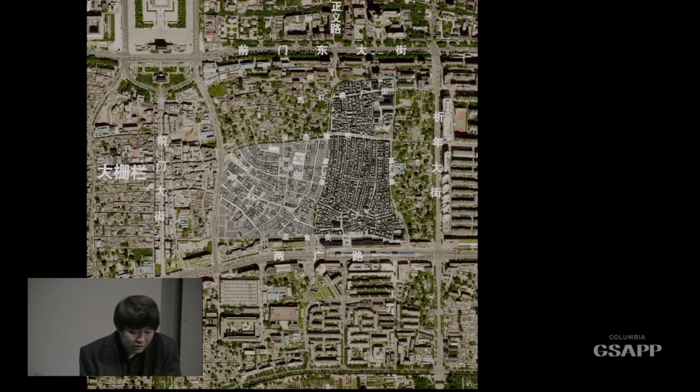But after, when I came to New York, I saw a completely different type of city—not only the vertical skyscrapers, but the intensity of how the city presents itself. In Chinese eyes, beyond just the intensity of the skyscrapers, I also saw a poetic atmosphere behind this type of scene.

In my eyes, at the time, the city transformed itself into a traditional Chinese vertical hand scroll. It has mountains and seas and valleys. Even the water towers on top of the buildings, in my eyes, became little pavilions and tea houses. It stirred up a lot of imagination.

Even the noise, the ambulance, the fire trucks on the streets—to me it very strangely transformed itself into something quite different. So I always see the city existing in two different ways. One is the city we experience in the public domain, on the streets—a vibrant city.

But once you get on the elevator and go up through the dark tunnel, all of a sudden you reach the top and see a completely different kind of city. So it's a city above the city. It gives you a completely different experience.

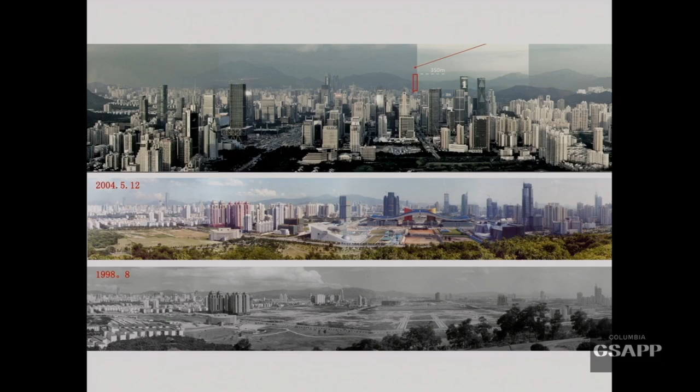We have been very consistent to concentrate most of our work in the city. We thought that architecture tries to reestablish and stimulate a meaningful urban life in the current Chinese urban reality. And we witnessed the kind of dramatic change during the past 15 years in Shenzhen.

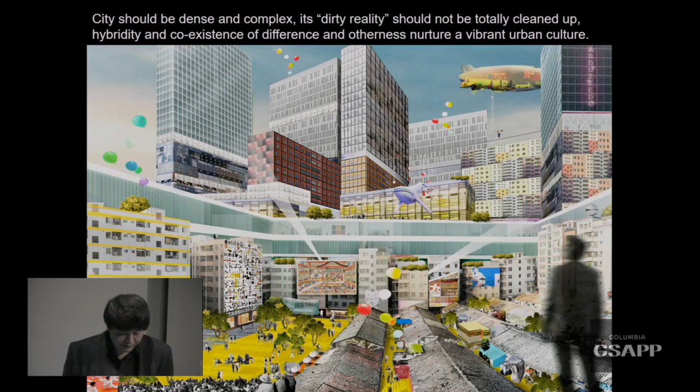We believe that the city should be dense and complex. It's kind of a dirty reality, it should not be totally cleaned up. Hybridity and coexistence of difference and otherness nurtures a vibrant urban culture. I think that belief supported us for all these years' work.

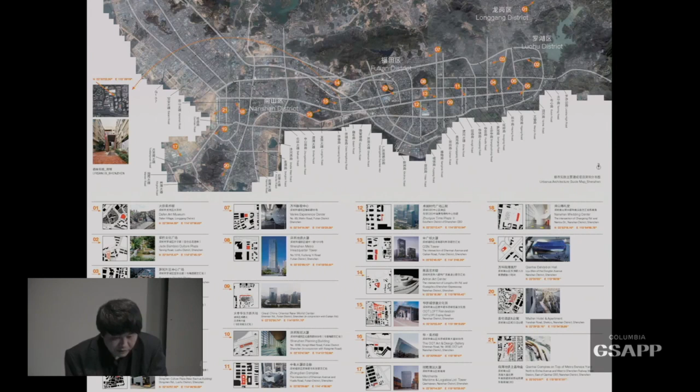And we have done a lot of projects. I'm not going to talk about all of them. I would need like 3 hours to do that.

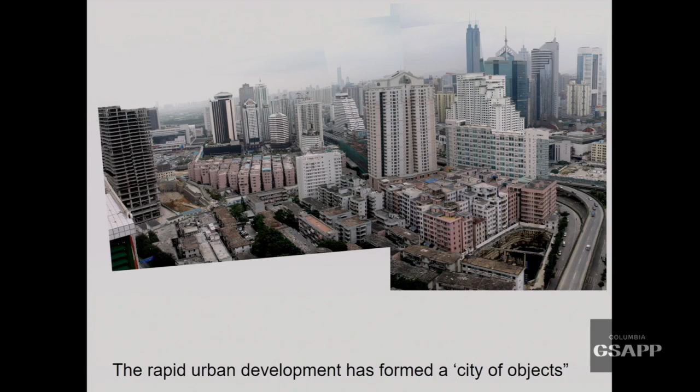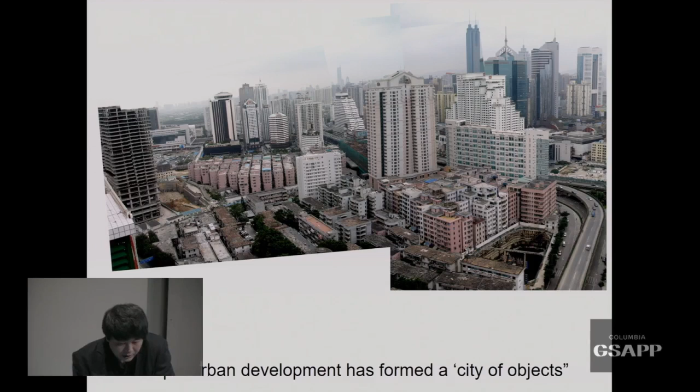But this is the kind of condition that we were facing once we were in Shenzhen. It's a city of objects, of things crammed together without much organization. If you look at this picture, it tells you the kind of situation. Because of the fast urbanization, there are isolated urban voids and residues everywhere.

So the very first task for us, these are very old projects, I'm just quickly going to go through, was to refuel all these kinds of voids. So we called it an urban refuel campaign, to try to establish linkages and new urban functions in the existing urban space.

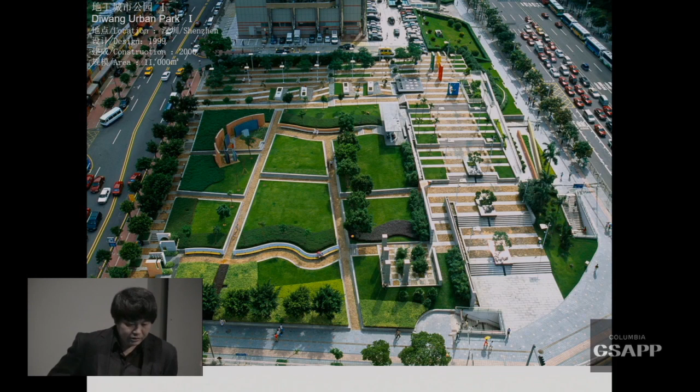Resulting from that, we did a series of these urban public spaces, because there wasn't much else to do at the point. So we picked up all these little jobs and tried to fix them.

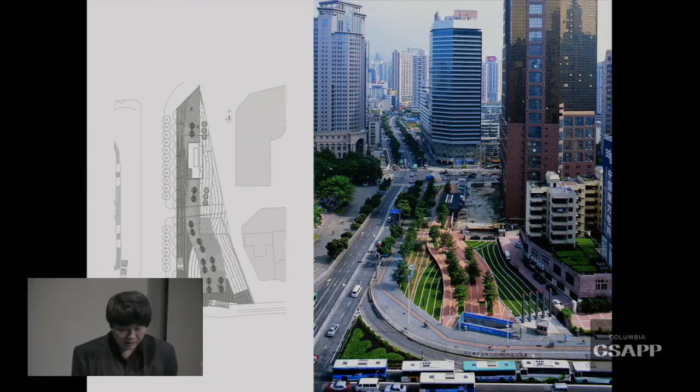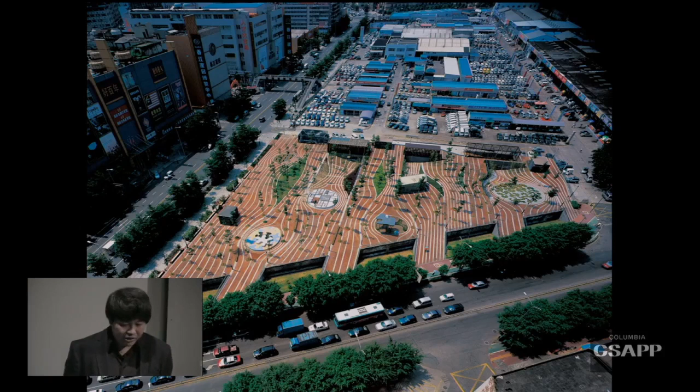But I think the point is that at the time, because of the unstable situation, because of the clients, a lot of times the city, the government, doesn't know much how to handle this type of residue space. So we gave them suggestions and proposals, and they accepted.

A lot of times, for example like this, architects have an opportunity to work with the clients to figure out not only the building program, but how to use them.

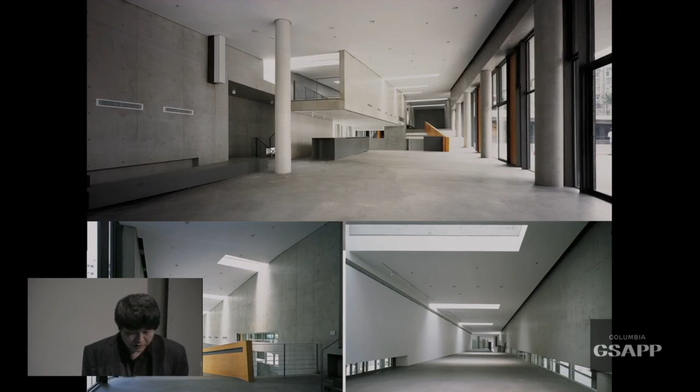So this is one of the first built projects we did in Shenzhen. It's a little museum building with landscape and public space. And it's also one of the first exposed concrete buildings in Shenzhen.

And residue places like these, gradually we transformed them into little gardens and pavilions. We have kept doing this for almost 10 years.

A lot of these projects are already gone in the process of the latest urbanization. It played a significant role at the time to provide leisure spaces and public pocket parks for the immigrants in the city.

So then we realized that it's important, when practicing in a brand new place, to research and learn about the city even before you start designing. So we call it research design.

I think the key point is this particular project. The research we did is not just research for research's sake. It really, at some points, led to the final design product.

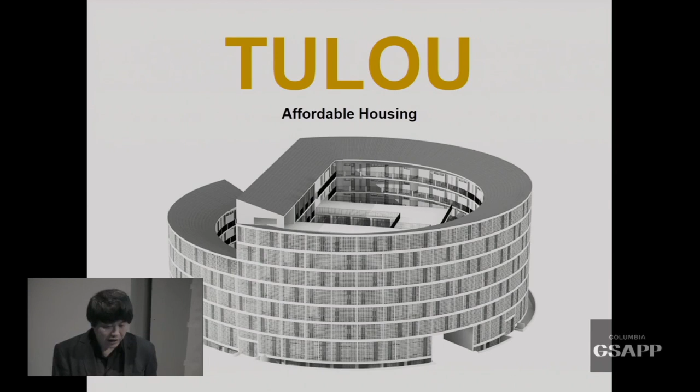So it was at the time when the housing price in Shenzhen exceeded the capacity of the majority of people who lived there to buy the product, to buy the housing. Around 2005 and 2006, it was the point the price got skyrocketed.

It was exactly the same time we got the task. It was a research topic, it wasn't a real project at all. A lot of people didn't know that.

It's a research project to study the possibility of adapting this typology, this prevailing tulou typology, into a kind of dormitory-like new housing. So it was a given topic, and we did this research.

We researched all the different sizes, the spatial configuration, and also how people use that. So we came up with a series of research findings and proposals.

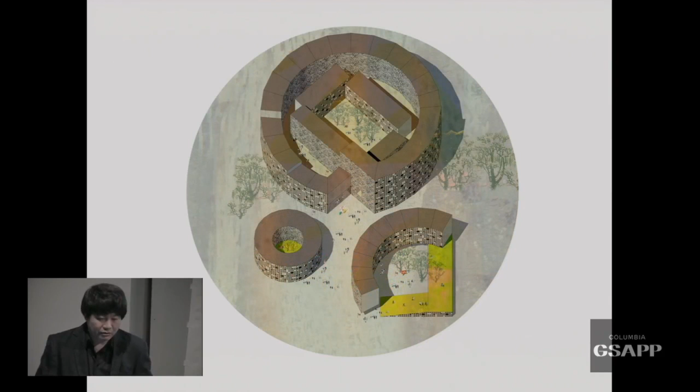Sometimes we think that this typology can be used in the urban condition on top of the shopping mall, or maybe more isolated, or somehow combined to create a little group.

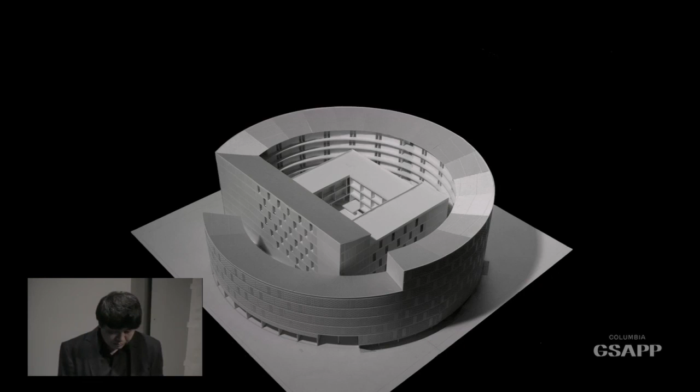And finally, the developer got interested, and they decided to do an experiment to maybe build it. So they selected one of the topology. This is how the Tulou came into existence, really because of the research.

More importantly, we came up with a strategy for how this could be adapted in an urbanistic condition, and how the city and developer could collaborate to acquire cheap land to put this kind of low-income housing anywhere in the city. This is how it's adapted in the end. It becomes, instead of a castle-like typology, really open and porous.

Originally we didn't have a site. But later on, together with the developer, we found this one close to the highway. So the dialogue between the building and the neighbor becomes really critical.

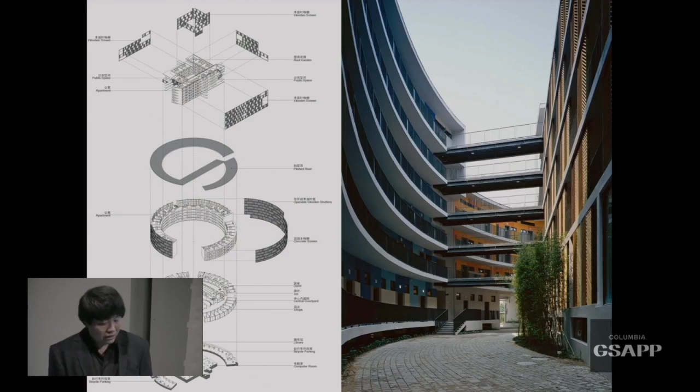The materials we use are really cheap prefab concrete panels. The building itself is a hybrid building - it's not just housing, but also has a little inn and public facilities and things like that. So it really becomes a testing ground for a new kind of collective way of life that has been gone for many years.

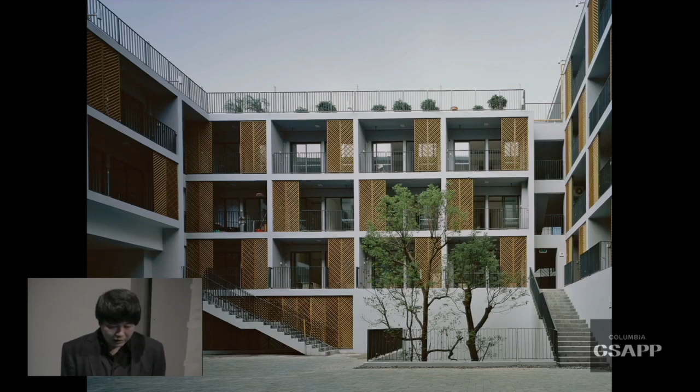So we did that internal courtyard. We added a bit more dense area, and we built it in 2008.

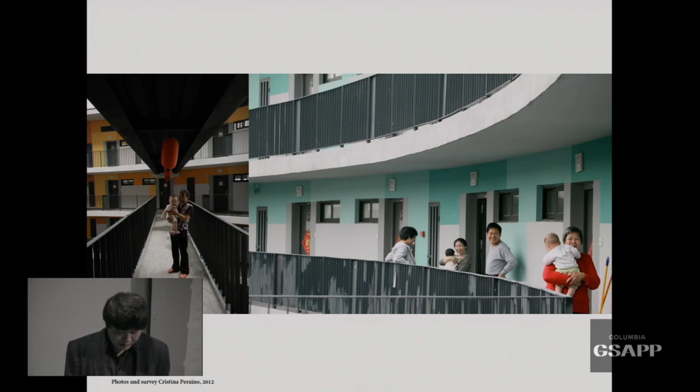Life has evolved quite a bit after its completion. We've been using that as an example to see how a new community is formed. We're very glad to see that there have been 24 newborn babies out of this Tulou. There are many babies along with old ladies.

Hybrid stacking - we learned the experience from New York and Hong Kong as well, how to do vertical buildings. In a site like this, it's a very dense urban site in Huaqiangbei, which is very famous for electronics. At one point it contained 60% of the electronic parts in entire China.

This huge market is vibrant, full of activities. But what happened is that the city government always wants to clean it up and make it a usual shopping area instead of studying the nature behind it.

So we did a lot of research on Huaqiangbei and saw how different businesses coexist in this type of urban condition. It's really not just a shopping street - it's an area intertwined with a lot of different forces.

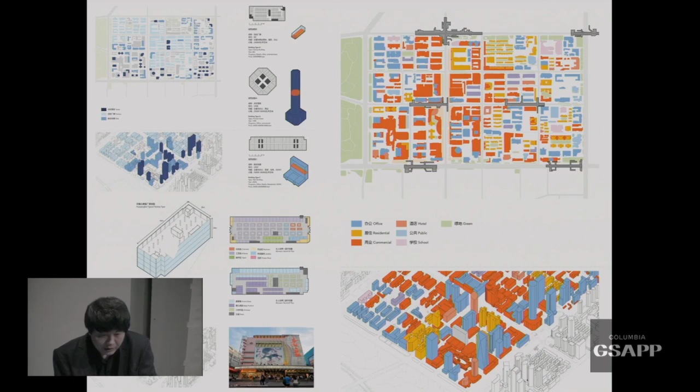So once we had a project in Huaqiangbei on a very tight site like this, we noticed that there are about 200,000 people passing by this site every day. The site had a small hotel in the middle, and the client called for a vertical parking structure with compensation for this hotel.

So what we figured out is that it's a good opportunity to reroute a lot of the existing traffic - pedestrian or vehicular - and also the logistics on the site. So you see the building actually has a lot of arms connecting to the existing buildings.

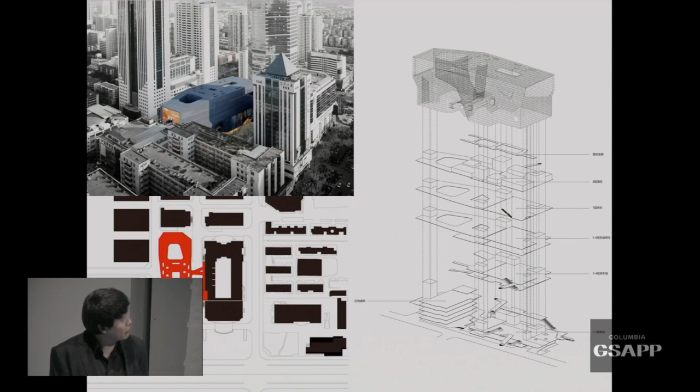It's an infrastructure - a vertical infrastructure. It contains retail space on the ground floor, logistics underground, multiple parking structures in the middle, and a hotel on the very top. So it's a very hybrid building.

The requirement was that there was one existing building on the site which couldn't be demolished, and all the businesses had to keep operating during the construction process. So it was quite a challenge to keep the building with all these volumes added on top.

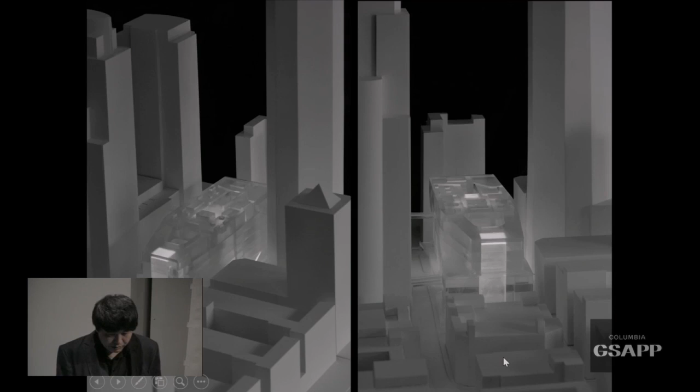So this is the kind of model that is more than a regular building. It really becomes a machine that contains all these different portions. Even the multiple parking is considered flexible for future developments, maybe for retail, maybe for other purposes.

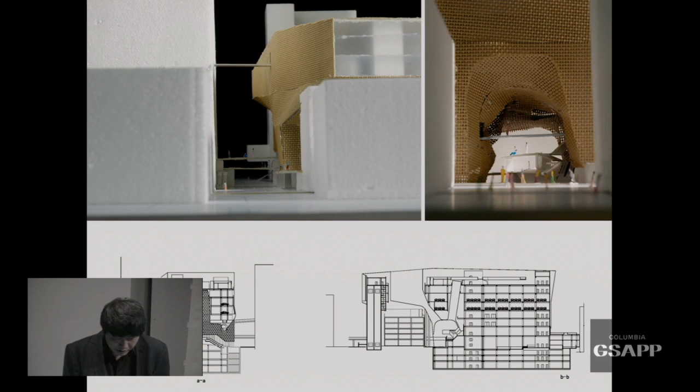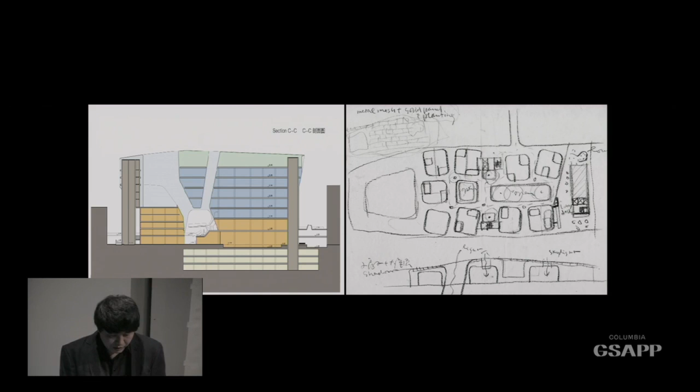On the top, I was envisioning a kind of village-type hotel on the very top, because of the privacy issue - you have to keep the privacy.

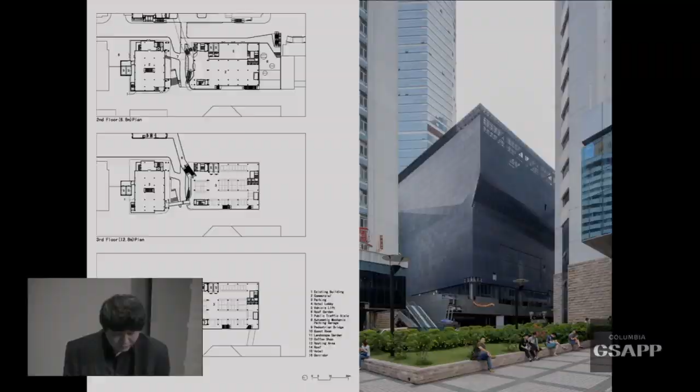It tries to link with the surrounding building. You don't see this building from the street. It's actually internal, and it's hidden.

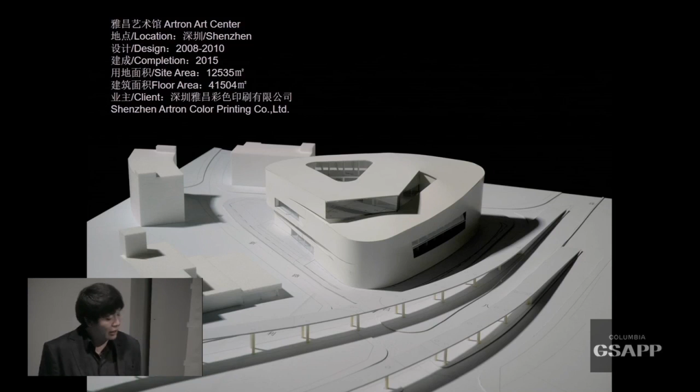So this is, for us, a very interesting typology that we carry this thinking in a tight site into different buildings. For example, like this one.

On the periphery of the site, the clients called for a hybrid building with factories, a museum, and a library, and their headquarter office. We can't put regular buildings on the same site, so we have to stack them somehow from the bottom up. And so we figured maybe the building can be integrated and works also with the surrounding, even if it's a very tough, kind of chaotic situation like this.

I like this photo. It's a hybrid building. So the museum is at the very top, the factory is close to the noisy highway, and the office is at the other corner, forming an internal courtyard.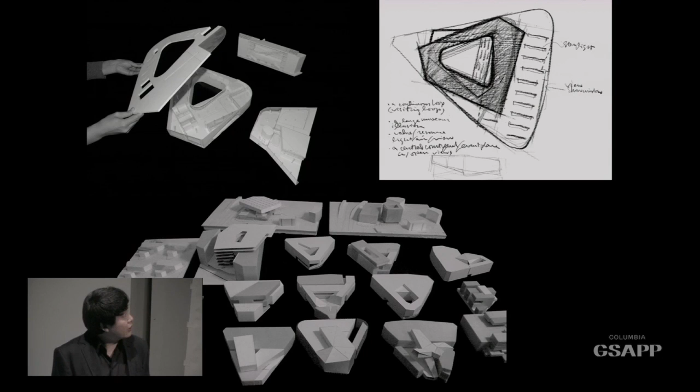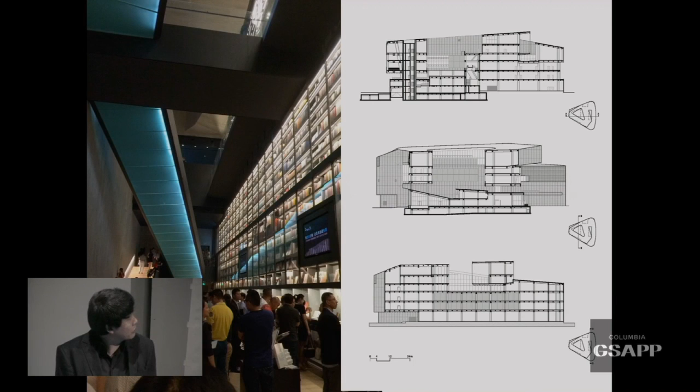So the building looks simple at the beginning from the outside, but it's very complicated inside. It has a kind of vertical library at the very center of this building. It cuts through the entire plan, and the factories and the museum can see each other at the beginning, at the middle. So this is kind of the library.

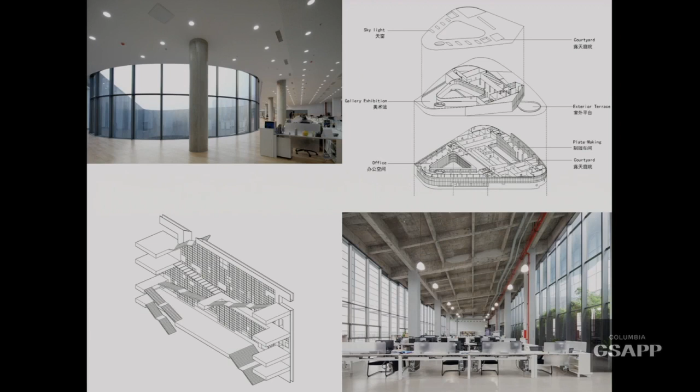It's kind of like an urban square that people meet every day. You have to go through this space to go to a lot of other functions in the building. So it opens up this kind of internalized public space in the middle.

So even the stairs, the courtyards happen everywhere in all parts of this building to get light and ventilation. So the building becomes monolithic at the same time, but also hybrid inside.

The competition called for a cultural and sports center on a very tight site. But later on, after we received the brief, we figured out that it's a very rare opportunity that we can stack things, and we have to build almost 70 meters of this cultural and sports complex.

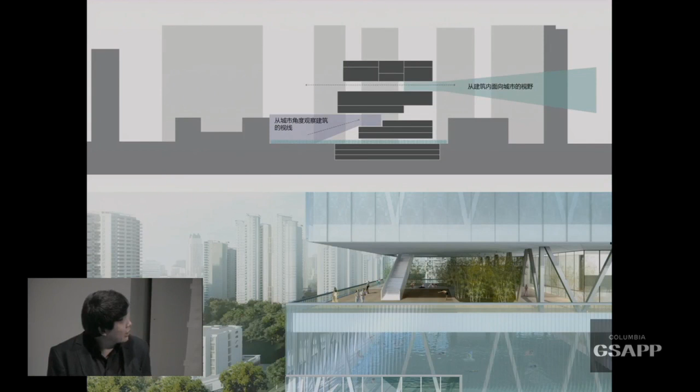So the circulation, besides the vertical elevator shaft, we created this type of linkage. We learned a whole lot from the Hong Kong and Singapore shopping malls, the vertical shopping malls. I think that could really create different layers of public space in the air.

So look at this section. It has the three components: the bottom, the theater in the middle, the library, and the swimming pool and sports.

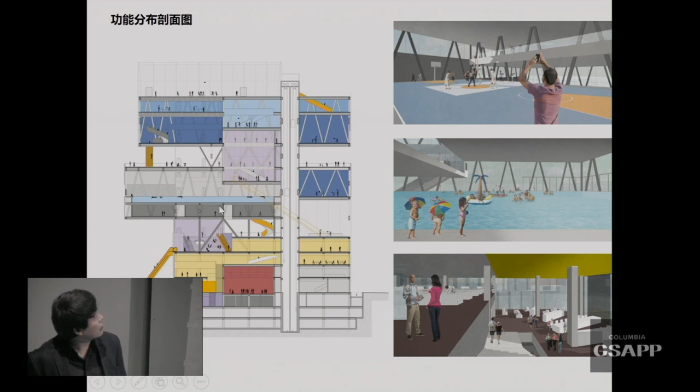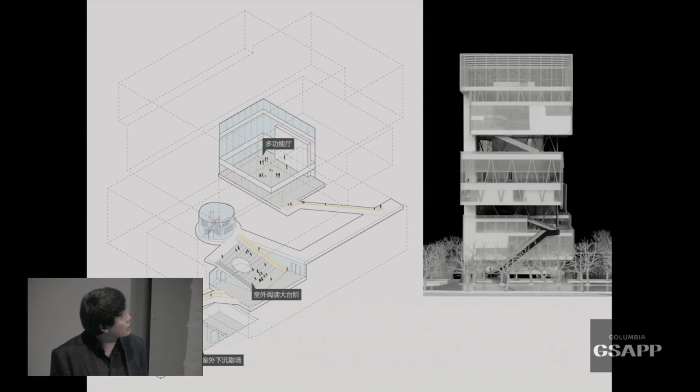And between that, there are public gardens connected by huge escalators, and they are linked together. So even after each component, each box, is closed at night, the public access is still valid. This is the model to show the kind of relation.

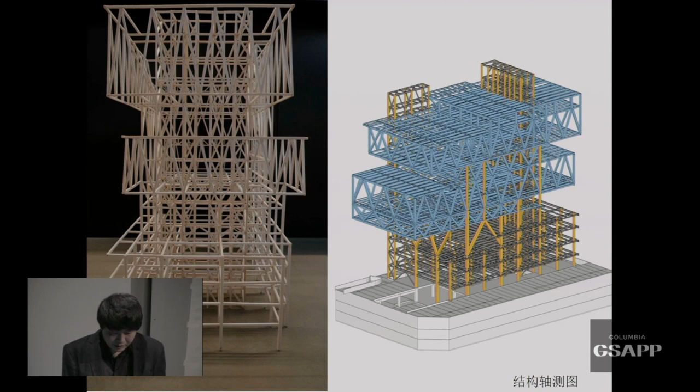Of course, this is very challenging structurally, so we hired a very good structural engineer to make the structure transfer, a lot of complicated structure treatments to make it happen.

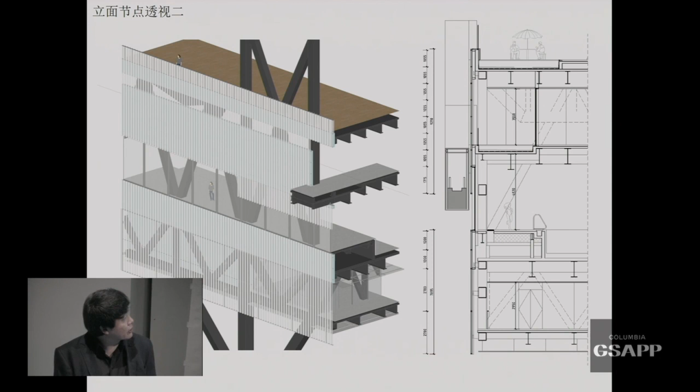So this is going to be how it looks. It's still in process.

So the very last of this series of stacking typology is this. We have a site between two little hills.

Shenzhen was a hilly town before. Because of the fast urbanization, all of the hills were razed to flat in the past 20-some years. So these are the two remaining hills in the middle of the city at the moment.

So you see the stripe here, right in the middle. There was a factory, and the developer got this space. There's a huge site; they want to build a kind of complex. It's a commercial complex. But what they did, this is the SOM master plan.

And we were given this. They're basically towers by SOM, and this is apartment towers by a Hong Kong firm. And Arquitectonica is doing a huge shopping mall at the bottom.

There was 100,000 square meters of loft apartment buildings left on top of the roof of the shopping mall. We were given the problem to design these apartments because the developer thought they could make enough money from the towers and the malls. So they didn't care. They said, whatever you do on top, if you do a slab, that's okay, if you do something else, it's probably also okay. But get us the 100,000 square meters done, that's it.

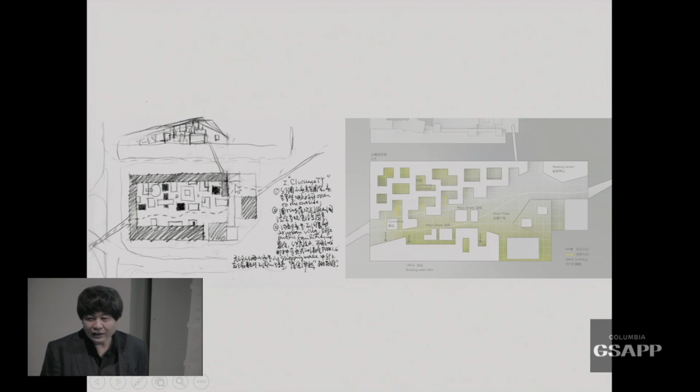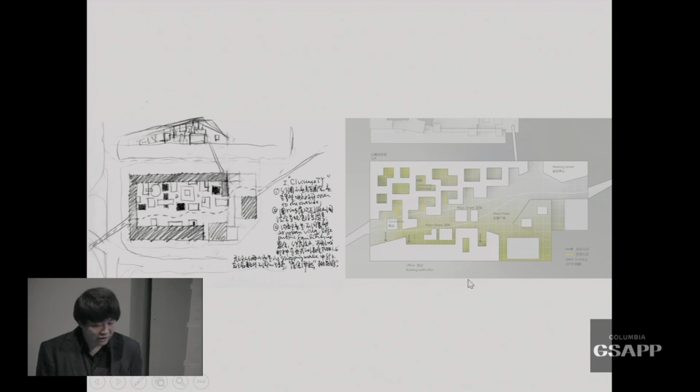So we talked to the client, maybe we can make it flat. We can do an urban village on top of that shopping mall. The client said, wow, it's a good idea, but remember, you're going to get the same design fee. That makes it a really tough job, right?

So we decided, okay, maybe we can do something that's never been done this way, to have smaller buildings on top of the huge shopping mall, which can really form a village-like setting, so that people going from one park to the other can pass through this area. We thought this is really different.

It reminds me of the New York experience. Once you're in a shopping mall, you don't know what's above you, and then all of a sudden, once you go through the escalator or elevator, you go to the top and you see the village. All of a sudden you see the village and you see the hills. So you're above the existing city. It's quite a poetic kind of idea.

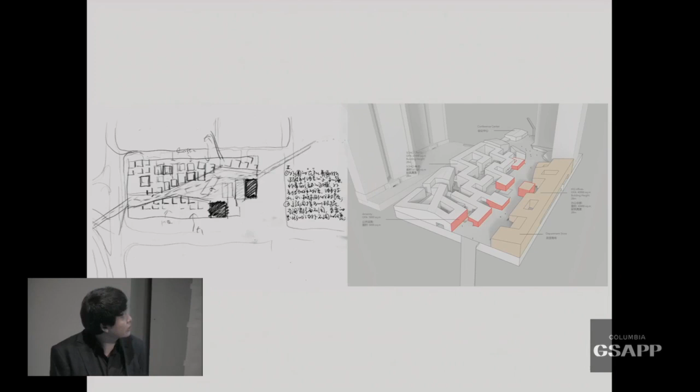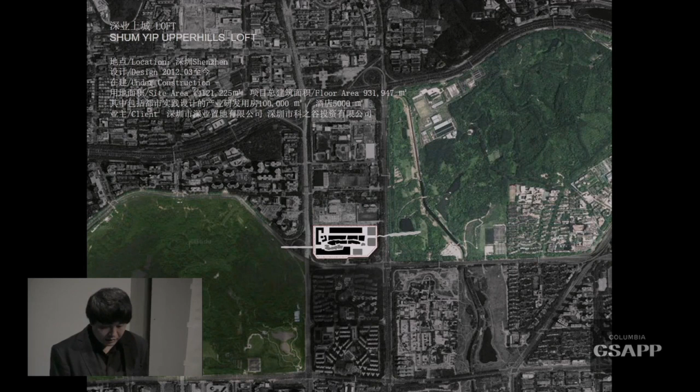So we thought, okay, let's do that. We created this little village with the bridges. It becomes an interesting kind of urban design project.

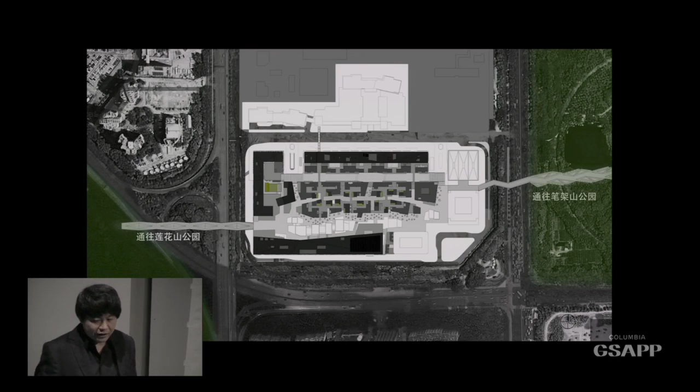But simply creating a village isn't really enough, because it will look really odd if you have a cluster of small buildings on top of the mall that has to have a dialogue with the towers. It's really tough. You have to somehow be small and big at the same time.

So we created this envelope, intermediate clusters of loft spaces that surround the village and can dialogue with the bigger towers. So it creates something like this.

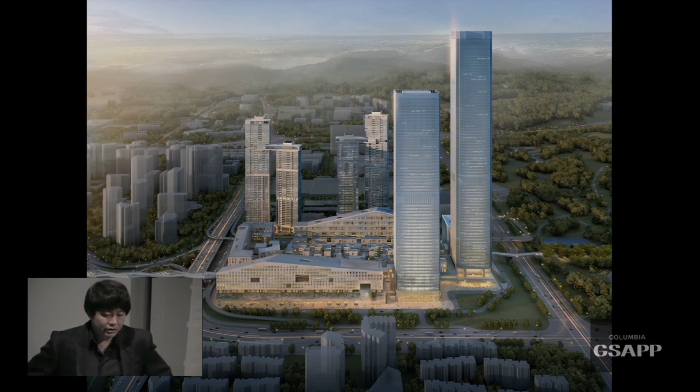On the other hand, we're not afraid of commercial projects. I think we do a lot of commercial projects. I think they have a lot of opportunity to have a bigger impact on the city than smaller works.

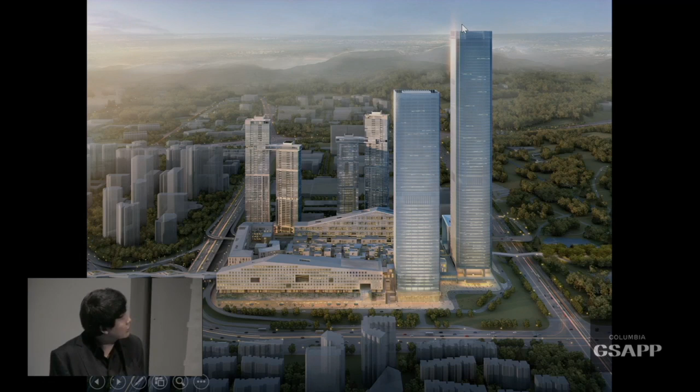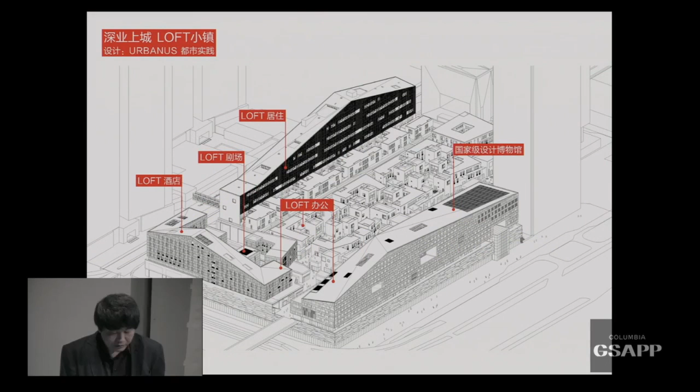So it created this layering of spaces, smaller in the center, bigger volumes surrounding. So we have this gradient kind of scale, and you see the mountains beyond. There's commercial and loft space, residential, office, museums, theaters, all together on top of the existing buildings.

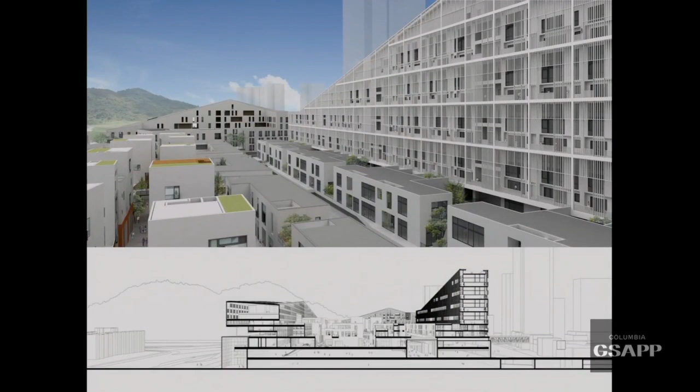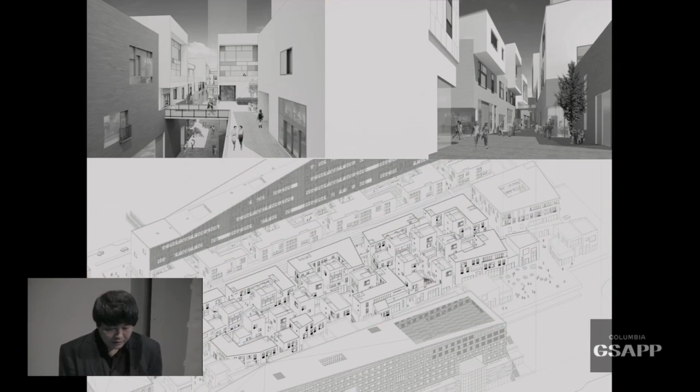So we tested all this, different sorts of units. The units are flexible, they could be 4.5 meters or 3 meters tall, so they can be modified later on. Architects only lay out the framework, and the users can later make modifications.

Okay, so beyond this architectural project, I have to speed up. I'll talk about another topic, which is the city's growing difference. Why does the biennale this year have to be in the urban village? What is the urban village?

Within most newly developed Chinese cities, the urban spaces are dominated by autonomous architecture typologies, such as gated communities, giant shopping malls, isolated office towers, and theme parks. This is very typical. On the other hand, the urban village, like this, is a byproduct of rapid urbanization. It's the result of this dual system of the previous planned economy—land ownership created this kind of urban setting.

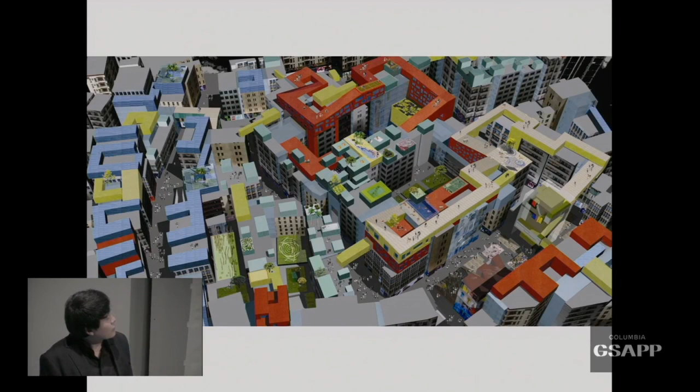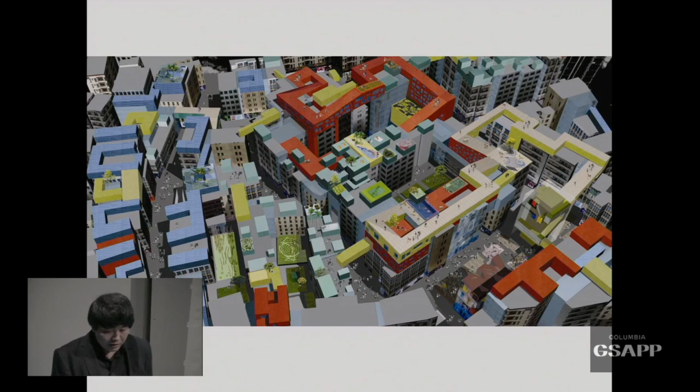Starting 2004, we have been researching these urban villages. We are trying to find ways to solve these problems, the super dense condition, lack of public spaces, and all these issues. Can it be resolved, or does it have to be razed for the urbanization? So we envisioned at that point a kind of rooftop urbanism which can connect all these buildings. We thought that could be a way to do it.

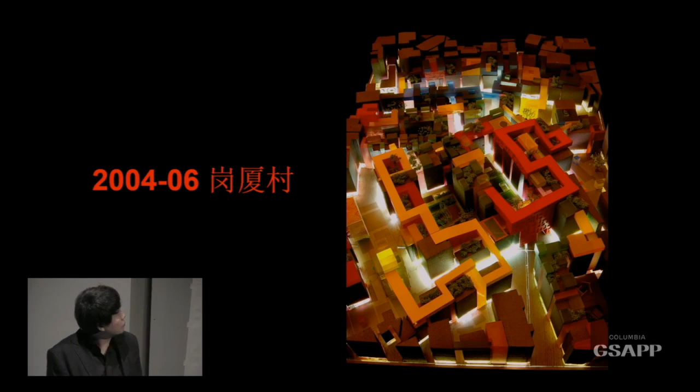In 2006, there was a critical time when the first urban village got demolished like this. And it was a very different, so-called successful story to regenerate the village across the border of Hong Kong. So this is the very first example.

It was at the time when the city of Shenzhen tried to integrate the urban village into the city, to get rid of all the urban villages in 5 years. The city announced the big plan in 2005. It was at the same time the first Biennale of Urbanism and Architecture happened, in December the same year.

So we exhibited the urban village proposal in the first Biennale, and we showed the city there are alternative ways to do it. That was a critical moment. Then we published this little booklet about the urban villages. But unfortunately, just before the Olympics in 2008, the village we were focusing on was demolished and replaced.

So a little bit later, we got involved in a real urban village intervention project in Dafen village. It was a typical urban village in the midst of the city. But it's also a special village because it contains a very interesting enterprise—an oil painting business that was imported from Hong Kong in the late 80s.

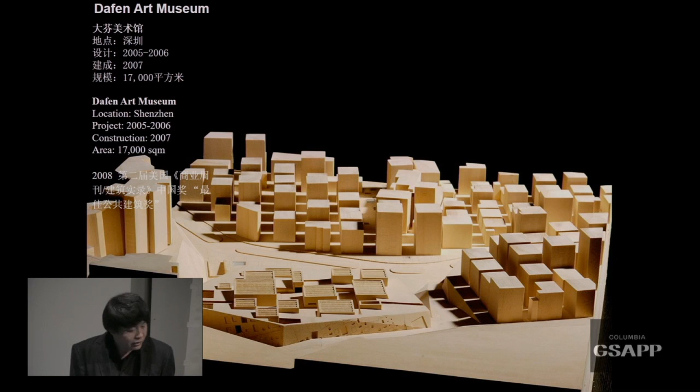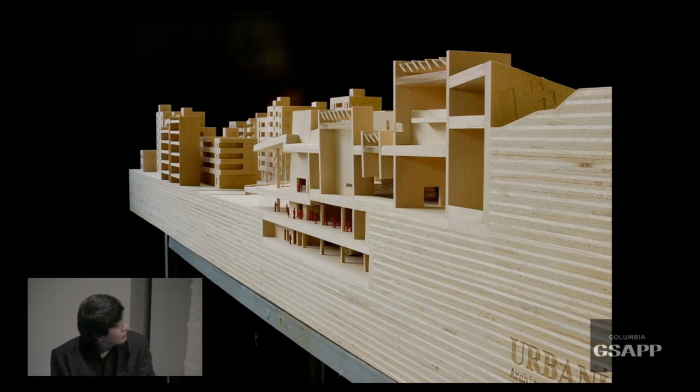So we thought the museum is a good opportunity to really make a linkage inside the village. The museum should not be a typical museum—it should be a sandwich, a kind of overlap of different things. Maybe the market on the ground floor, the typical museum on the second floor, and also a village on the top. So we made this proposal and it was finally accepted as this kind of hybrid museum in the urban village.

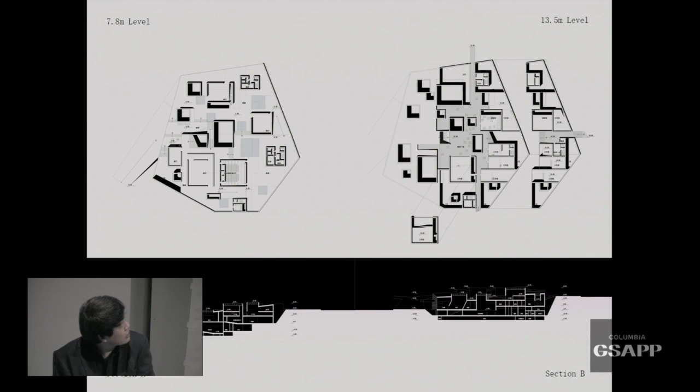The ground floor was seen as an extension of the existing fabric of the village with markets and a lot of public functions. The second level is a typical white-box museum. And the third level is a village of rentable spaces for tea houses, bars, restaurants, and a lot of other things that a typical museum doesn't have. We see the museum as a device to bridge the village with the surrounding city.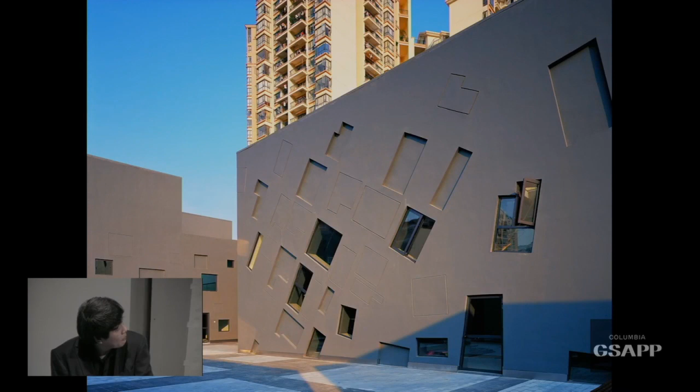So the museum was built in 2007, and it was kept empty for a while. This is a village on the top—this is a vision that we provided. It shouldn't be that simple and clean; it should be hybrid and vibrant. But now, after almost 10 years, it becomes one of the most visited museums in the city of Shenzhen. It's free.

It accepts a wider audience because of the peculiar location. It attracts a lot of visitors as well. So later on, we also organized a painting wall mural exhibition at the museum. So the museum itself is evolving.

It seems like an ever-ending project. 2010 is a critical point when for the first time we put the urban village on the international level. We made it really a public event. In the case of the World Expo in Shanghai, we designed the World Expo Pavilion.

Also, we organized events in Dafen. We produced this installation project with 500 more artists in Dafen, telling the individual story of each of these people who worked in Dafen for all these years. So this is really an exhibition not about architecture, it's about a group of people.

Their personal stories collectively become the Expo Pavilion. So it always has different kinds of components in the exhibition, which are interactive. And also in Dafen Village, there are a group of architects and artists who rework the museum with murals and other installations.

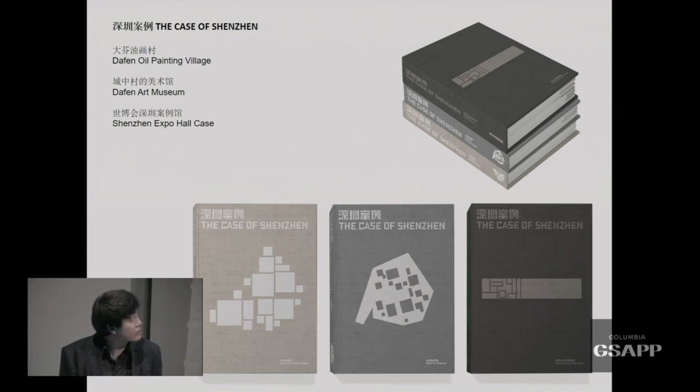And then we published a set of books. It's a collection of little books about Dafen, the museum, the story of the people, and also about urban villages in general. There's a new set of books coming out this year, called Shenzhen Case. These are the byproduct of the Expo project. It includes thorough research of a lot of the urban villages in Shenzhen, including Dafen as a case.

In 2011, we formally started this research arm of Urbanus. We started to use this opportunity to study the post-urban village time, which it seems we're unfortunately entering. Starting in '95, you see the city only contains this type of configuration, but after only 10 years, the city has expanded so dramatically. It seems that we are entering this kind of post-village era.

In Shenzhen, because of limited land resources, the city is undergoing a huge campaign of so-called urban regeneration. There are projects everywhere which contain hundreds of millions of square meters of regeneration projects. They're all the same pattern.

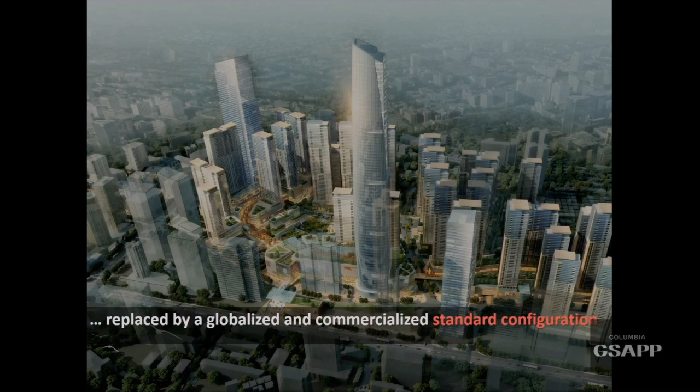So is tabula rasa the only model as Chinese cities now face this new urban regeneration process? We're asking: has urban renewal swept away the time-honored historical areas and the hybrid urban life? This is the condition we're facing - being replaced by a more globalized and standardized configuration everywhere. Not just one, but hundreds of these are happening. All the urban villages are about to disappear.

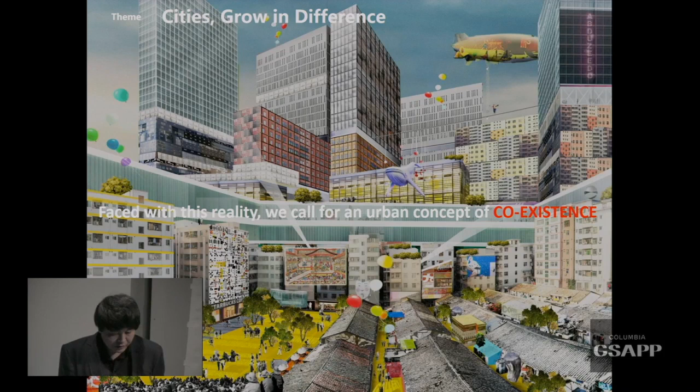So at that point we came up with the concept of cities growing in difference - it's really not just about the urban village, it's about the future of the city. Can we have a new city paradigm of coexistence? Today's city should be a manifestation of a balanced coexistence of different value systems. It should be a civilized community with maximum heterogeneity and diversity, in which people co-live in one world sharing a variety of dreams.

So this is contrary to the Olympic slogan I remember - one world, one dream. I thought that was pretty scary, so I came up with a very different idea: Cities, Grow in Difference highlights multiple identities and multiple perspectives. It emphasizes difference, hybridity, and resistance. That was this year's Biennale.

So the last story I'm going to tell is about the venue of this year's Biennale, because three weeks from now we're going to come again and talk specifically about the Biennale. So I'm not going to talk about the exhibition, but the venue. Why here? Once again, a lot of people still believe that Shenzhen was a little fishing village.

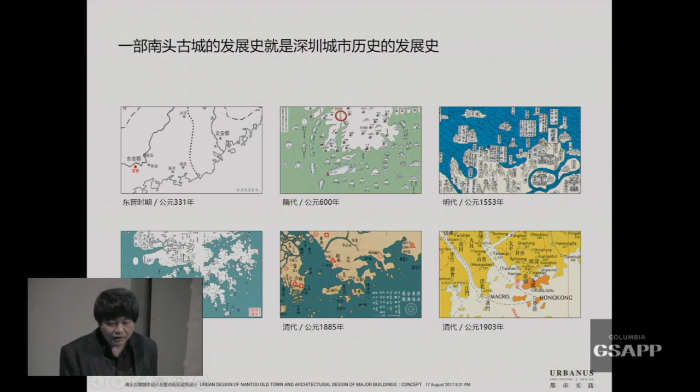Let me tell you, that's not true, once again. Shenzhen was an old city. Nobody trusts me - look at this map from the Qing Dynasty. The city of Nantou is here. Shenzhen has a history of more than 1700 years.

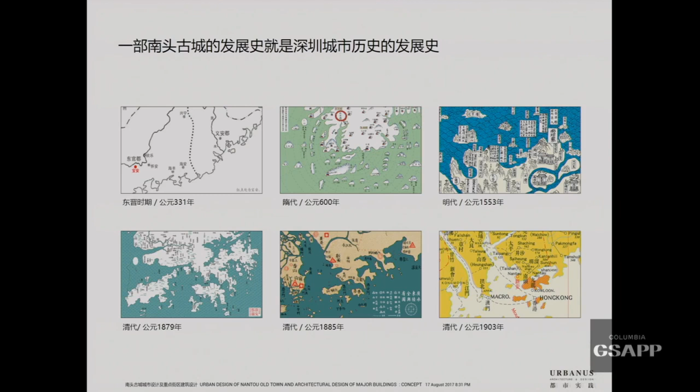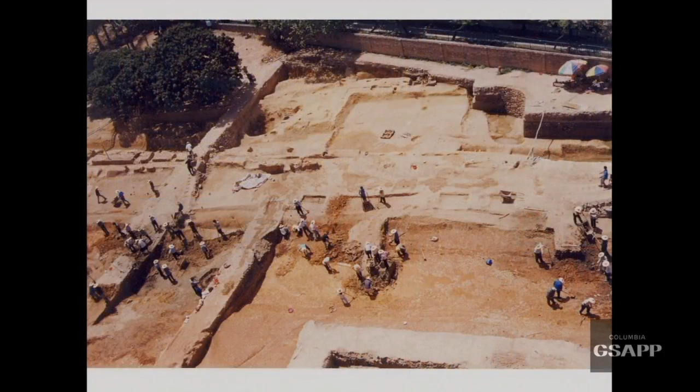It's a very old town. Look at all this involvement - I'm not going to go into details, but I'll show the pictures from the Qing Dynasty. In the 80s and 90s, the city evolved. This is the excavation, the site where people found a city from 1700 years ago, in the Jin Dynasty, Dongjin.

This is the site. But unfortunately, the old city was 90% gone. It's an urban village at the moment. But look carefully - the old town is still there. It really becomes a mixture of the earlier industrial sites with the typical urban village.

You can tell this is quite a challenge for the Biennale. It's really an overlapping of a historical town underneath this contemporary urban village. So this is a very interesting situation - you have the village, and you have the remains, better sites inside the urban village, which are historical. So it's an invisible town, an invisible historical town.

But here we go. Let me tell you, this little city gate is older than Tiananmen in Beijing. It's 600 years old, from the early Ming Dynasty, you see that.

Indigenous culture in Shenzhen, unimaginable. Old temples, see the mixture of historical and contemporary condition. You see buildings built in the 50s, 60s, 80s, and 90s. So it's very rare in Shenzhen to have a whole spectrum of architectural heritage. You see the whole thing, the whole history there. This is a very vibrant site.

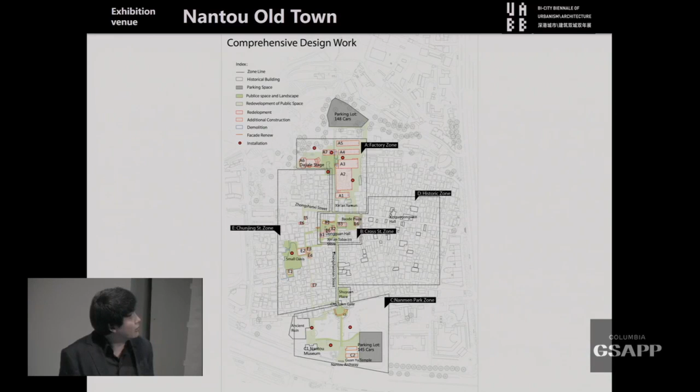So the Biennale will be part of the urban regeneration process. It's the first step, not the final answer, but it opens up an opportunity to engage the exhibition with the real village problems and conditions. So the Biennale will also be scattered throughout the entire village. In the factory zone, it will open up.

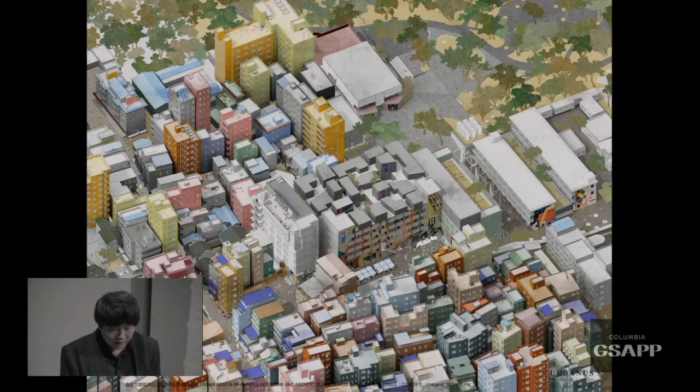This is a kind of longer view of this regeneration. In the center, in the public plaza, the exhibition will take the center space, and it will be transformed into a more public square in the middle. There will be additional small buildings, event spaces, and public structures erected in the museum.

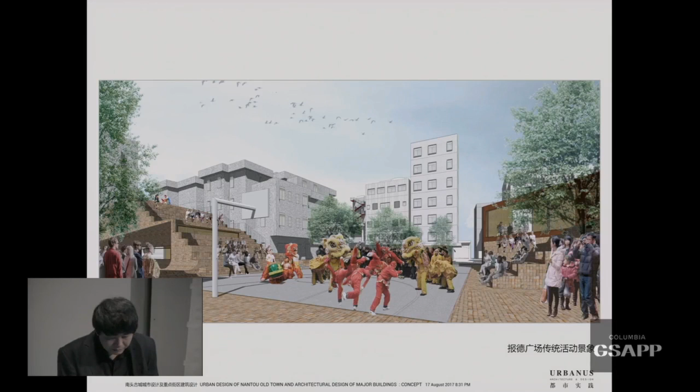So the exhibition becomes not only an exhibition itself, it is going to be a real intervention, and it is going to be an action. So in the end, in summary, an urban intervention is all we do. It is a reflective kind of action taken in response to the complexities and uncertainties in contemporary urbanism in China. It transforms the role of the architect from service provider to a multiple role of design thinker, researcher, urban curator, or mediator. Urban intervention is an activism with professionalism.